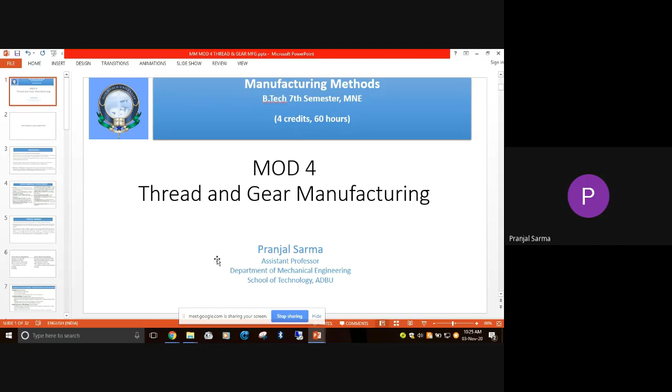So now we'll be starting this module, thread and gear manufacturing processes. Prior to going through the different processes, let's discuss your views first. What do you understand by thread or gear? Why is understanding this manufacturing process important? What is your view? Anyone? Or why is it used? Definitely it has to have some use, right, all those threads or gears.

So I think about gears all of you already know. So now, what about threads? Why are we specifically discussing thread manufacturing? Why do you think it is important? What are your views about this? Have you undergone any process by which you can generate or manufacture threads? I believe in your workshop you have done that. Anyone would like to share his or her views? You can unmute and let us know.

Seems like no one. Okay, so then we'll discuss.

Okay, so now this thread, actually we'll be mostly talking about the screw threads. So why are these very important? Okay, I believe about gears all of you already know. That means in kinematics and theory of machines also we have discussed different gears, how they operate, what is the use, etc.

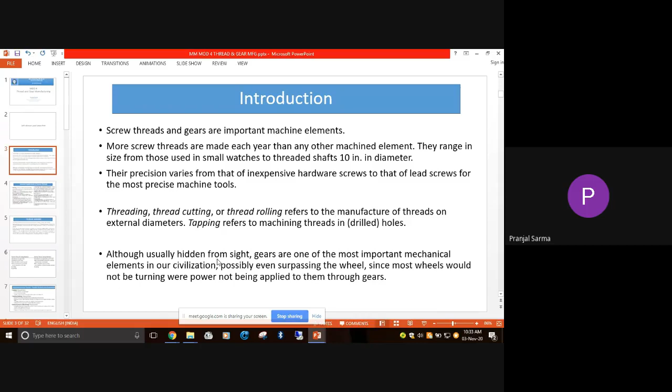So this is basically about your thread. And now about gears, we already know the importance of gears, from very small gears which you see in watches to the very huge gears in ships to propel them. It will be safe to say, even though the wheel is the invention which has changed human civilization, nowadays gears are even more important than the wheels. Why? Because to give motive power to the wheel, we generally apply the torque with the help of some gear arrangement. So that's basically about the introduction.

So I hope all of you have understood why the understanding of gear manufacturing as well as thread manufacturing is required. Yes or no? Let me know your view.

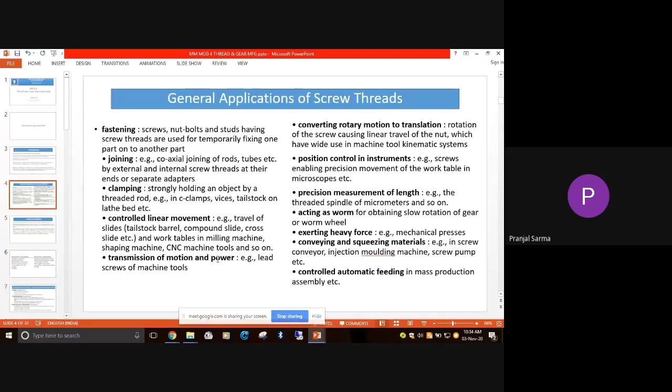Okay, so now some of the general applications of screw threads that we'll be discussing. What are the different application areas of screw threads? Screw threads can be used in fastening, just like the screws, nut bolts, and studs which have screw threads. Generally they are temporary fastening, not a permanent type of joint. You can join them, or if required you can separate the elements also.

Similarly, for joining purposes, we can use coaxial joining of rods, tubes, etc., by external as well as internal screw threads at the ends. And similarly for clamping purposes, to strongly hold the object by the threaded rod, like the different C clamps you have seen, benches, vices, etc.

You have seen there also you have got threaded elements, screw threads. Similarly, to give very controlled linear movement, like that of the traveling of the different slides which are there in the tailstock barrel, the compound slide, cross slide, etc., that you have come across in the workshop, and maybe the different CNC machine tools, which give a very precise movement or controlled linear movement. So in those areas also we see different screw threads, threaded elements are there.

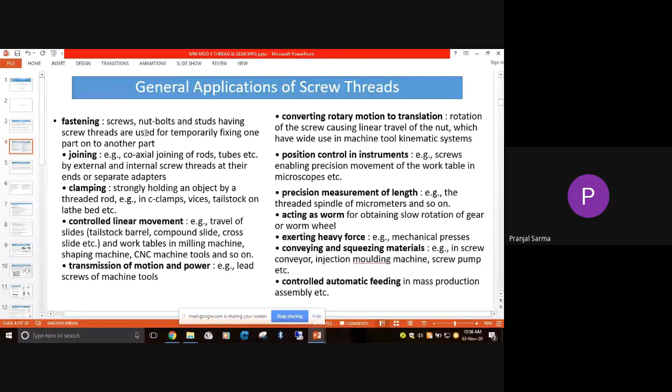Similarly, precision measurement of length, just like in the case of the threaded spindle in micrometers. And if you have seen the worm and worm wheel, the worm has got screw threads cut on it. Similarly, for exerting heavy force, for example in mechanical presses, you will come across different screw threads and so on. The list continues. So these are a variety of general applications of screw threads where you'll see threaded elements.

Now we'll be coming to the thread making process. There are basically three basic methods which are mostly used to produce threads: the cutting method, the rolling method, and the casting method. In the cutting method, you can very easily say that it's a subtractive kind of method. That means the profile of the thread, be it external or internal, you are going to cut on the workpiece, and thus produce the thread. So that category comes under thread cutting.

Next, we also have the thread rolling process. As we have already discussed about rolling, one of the possibilities we discussed there is rolling of threads by different thread rolling operations. In that case it becomes a thread rolling operation, and it's a kind of forming operation, that is, thread forming.

Similarly, by the casting method also it's possible to generate threads. For that you have to have the mold with the thread shape on it. Mostly external threads, or sometimes if you use a proper core, internal threads also can be cast. But threads made by casting are generally of short length, and the precision obtained is generally low in cast threads. So these are the three main methods by which we can produce screw threads.

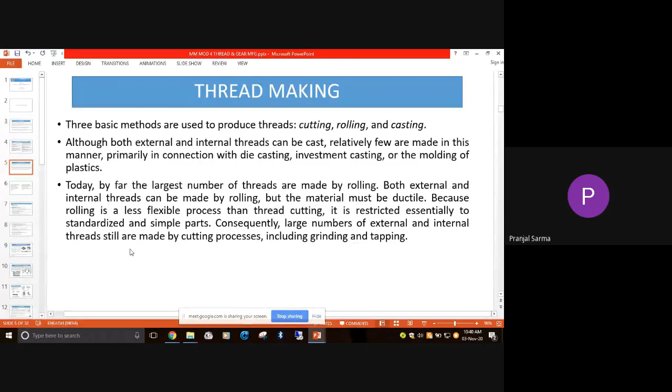And generally, this rolling is a less flexible process than your cutting process, thread cutting process. So it's generally restricted to standardized and simple parts. This is the restriction that is there. So because of that, a very large number of external and internal threads are still made by different cutting processes, and it also includes grinding, tapping, etc.

So in this particular list I have enlisted some of the possible methods to generate or cut external threads, and similarly, these are cutting methods only, some methods to cut internal threads. Now for external thread cutting methods, we can cut the threads by using the normal lathe, the engine lathe. Similarly, by using a CNC lathe, you can cut threads. And I believe thread cutting on a lathe machine you have already done as a task in your workshop, so you already know how we cut the thread in a lathe machine. Different attachments are there.

Similarly, it can be done manually by using different dies. And with the help of automatic dies, which can be used in a turret lathe, screw machine or CNC lathe, external threads can be cut. Apart from that, we can also go for milling methods to cut threads on the external surface, and there are even possibilities by grinding, specialized grinding. We are able to get the profile of the thread on the external surface.

Similarly, for internal thread cutting, we can have threading by engine lathe or CNC lathe. So it's possible to get the internal thread cut; for that, a specialized tool will be there, so the tool will be different. As you already know, for doing special operations we have different types of tools used in the lathe machine. Similarly, with the help of a tap and holder, we can go for cutting internal threads, and we have different collapsible taps which can be used in turret lathes and all.

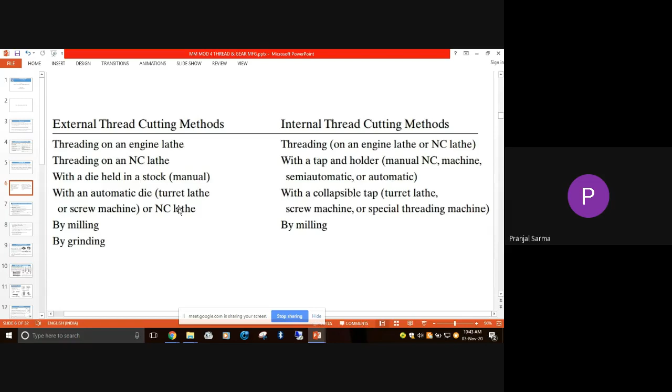And even by milling process, it's possible to get internal threads. Actually, with the help of milling, it sometimes even becomes easy to get internal threads. But for getting internal threads on the internal surface of a workpiece, we have to have the hole first. That is one of the basic requirements. And after that, on the surface which is generated mostly by drilling, we manufacture the threads on it. Up to this much I believe it's okay to everyone.

Just let me know, someone, have you understood or not? Yes, you have understood, right?

Okay, thank you. So now, in the subsequent slides, we'll be going through different possible methods of production of screw threads, and we'll look at their characteristics. First, we'll talk about the casting method by which we produce screw threads. Right now, everything we are talking about is screw threads and the production of screw threads, and we'll be discussing

the characteristics. So whenever we talk about screw threads manufactured by the casting method, in general, only a few threads over a short length are made by this type of process. Why? Because it is generally less accurate. The accuracy level is somewhat less and we have a poor finish.

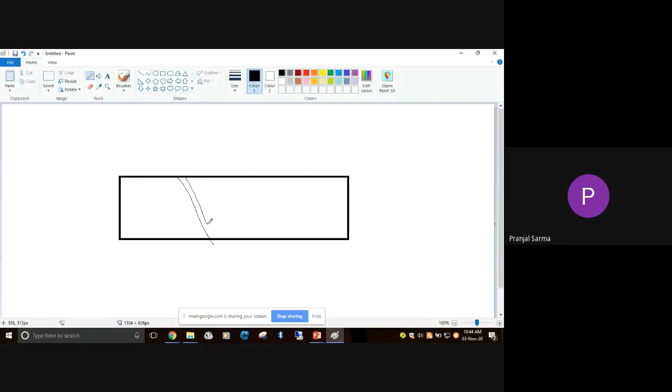So what is the meaning of having only a few threads over a short length? That means suppose this is the element, don't mind my drawing. If you are generating threads like this, we are talking about having only 2 or 3 turns over the length. That length is a kind of short length, so maybe this particular length we're talking about. Short length and having fewer turns, only a few teeth over the thread.

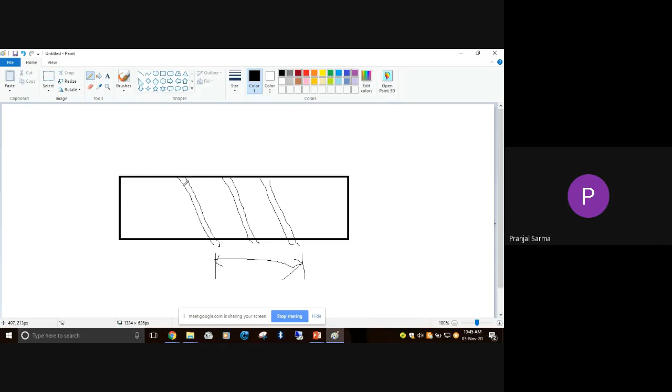That kind of thing is generally done by the casting method. Why? Because the surface finish that we obtain in the case of casting is very poor, and the accuracy level is also low. This kind of cast screw thread you can see at the mouth of different glass bottles, spun cast iron pipes, etc.

I think most of you have seen the thread in glass bottles. Maybe you have come across it in normal glass bottles for your milk. Only one or two threads. Whatever you generally call the cap has the matching thread, male and female parts. There you can see only one turn or half a turn, that kind of locking and unlocking. Very small thread, one or two turns.

Similarly, you might have seen ghee bottles which are made of glass, maybe Annapurna ghee or whatever you generally see in your household. There you might have seen that with these bottles, once we have opened the mouth, opened that particular cap, and closed it once again, open and close, the accuracy is not maintained.

While either opening or closing that particular cap, you have seen that if you just rotate it by half a revolution or within a single revolution, it opens. So that means there are very few threads. Understood.

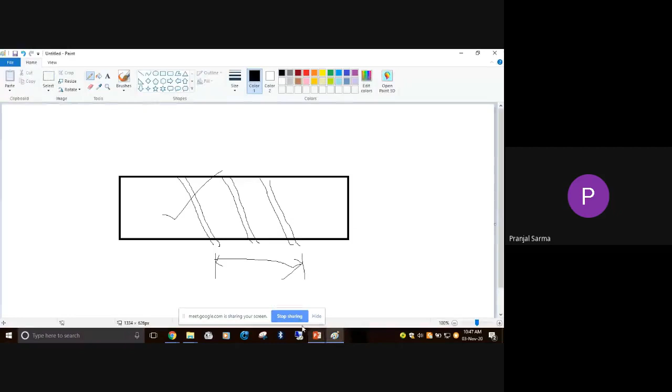Similarly, we can have a forming process, which we have already talked about, the roll forming process. So in that particular case, what are the characteristics? In thread rolling, blanks of different strong but ductile metals like steel, etc., are rolled between threaded dies. As we already know, this is a kind of forming process only.

So in that case, what will happen? Flat rolling is possible, and another type of rolling is also possible, which is circular rolling. Both are possible, but suppose I am talking about flat rolling. The workpiece will be here, and on this surface as well as this surface you will have the required profile of the screw thread. When you roll them using proper compressive force, it will be compressed, and on this workpiece you are going to get the thread externally.

So on this surface and this surface, which will be rolling, there will be compressive force. On those two surfaces' periphery we'll have the teeth profile.

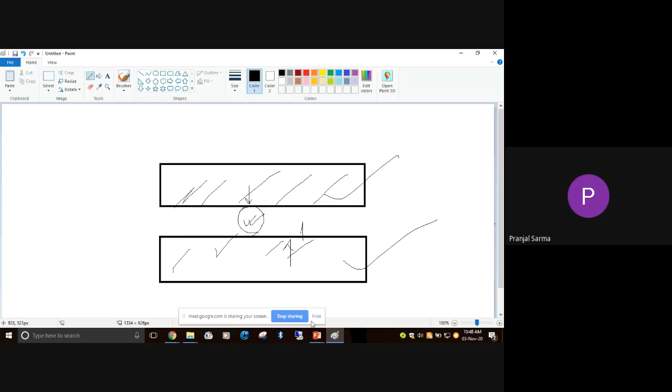Large threads are generally hot rolled, followed by finishing, and smaller threads are directly cold rolled so as to get the desired finish. Why are large threads generally hot rolled? Because in hot forming the ductility of the metal increases and the strength decreases, and the process becomes easier.

And like any cold forming process, cold rolling gives more strength and toughness to the threaded parts, and it is widely used for mass production of fasteners like bolts, screws, etc.

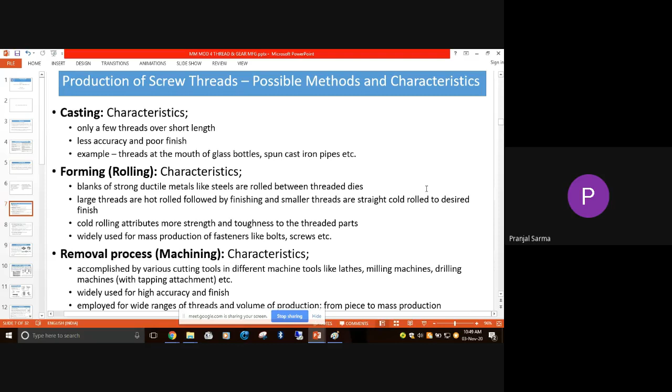Okay, that is basically the characteristic of the regular thread forming process. Similarly, we can have different machining processes, that is removal processes, and what are their characteristics? Now, in that particular case, removal processes are accomplished by various cutting tools in different machines. So we can go for lathe machine, milling machine, drilling machine; by drilling also that is possible.

We can use the appropriate tapping attachment to it, and even by using a drilling machine, generally a radial drill, we can make different internal threads also. These are all removal processes, that is, machining processes. And for getting very high accuracy and high finish, this kind of machining process is generally widely used.

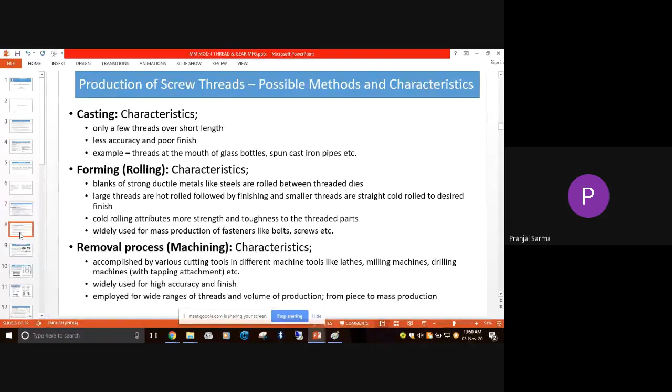And it also varies from high volume of production to sometimes even a single piece. That means the volume of production is a diversified range with this kind of removal process. Okay, so similarly we can have semi-finishing to finishing methods. Under that, grinding will come.

So generally, by this grinding process, even though we are saying we are producing screw threads, mostly it is done for finishing purposes, so as to get a proper and accurate surface. And generally it is done after performing certain machining or rolling operations.

And if we're talking of making threads in rods, sometimes this grinding process can be directly applied. A variety of type and size of threads is possible. The volume is kind of high volume; a variety of volume is also possible.

Similarly, we can go for different precision forming to near net shape forming processes. We have already discussed what we understand by net shape or near net shape manufacturing. So basically, in net shape or near net shape manufacturing, in a single go we get the end result. So no machining will be required in that net shape manufacturing process.

And sometimes very little grinding might be required so as to get a very high level of accuracy and finish. And for application, it's investment casting for job order or batch production. Or you can go for production by injection molding for different polymers, as we have already discussed. So it may be for batch production or mass production.